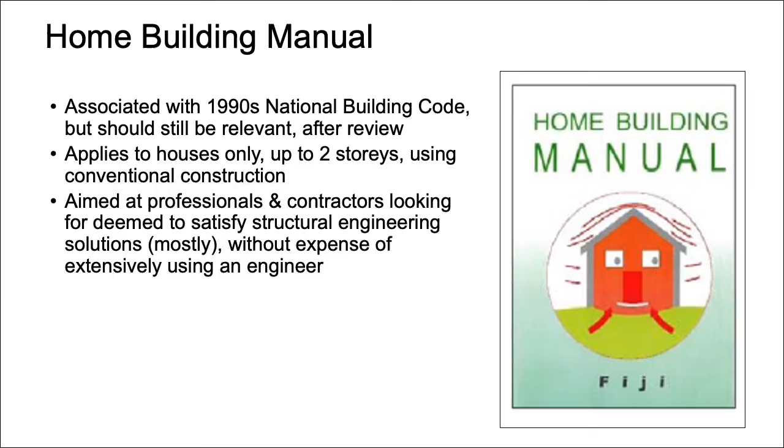And I will not be going into the details of the other provisions of these limitations. I hope you can have a look or have a copy of this home building manual, so you can be more familiar with its proper use, considering the scope and limitations of the basis of their design recommendations.

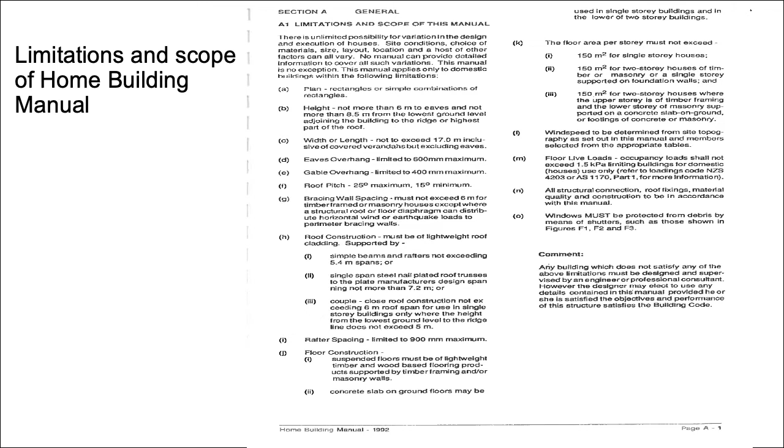So the idea in this home building manual is that based on the sizes of houses that it can be applicable to, and based also on the height of these houses, they are recommending the sizes of your columns, the sizes of your beams, the sizes of your truss, based also on varying wind speeds. So there's a table that you can just look up. You have the wind speed and the size of your structure, and then you'll get the size of your building elements, be it a column or a beam or a roof truss.

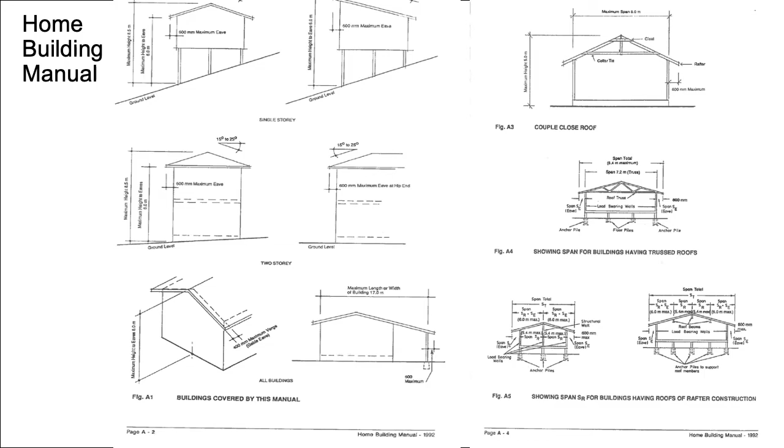So that home building manual, as I've mentioned, is still very relevant and very helpful to builders, because an engineer is not really required. All you have to do is follow the schematic diagrams that they have in there, and you'll be able to get the proper sizing for your building materials. And recently they have also been updated to consider the effects of stronger winds because of cyclones triggered by the changing climate.

So we have here the guidelines for improving building safety and resilience of new single-story houses and schools in rural areas of Fiji. This is a very recent publication supported by the World Bank. The same consultants have also looked at updating the home building manual in Dominica, and it is applied following the revised National Building Code for single-story residential housing, based on the Dominican experience following severe hurricanes there that heavily impacted the general housing stock.

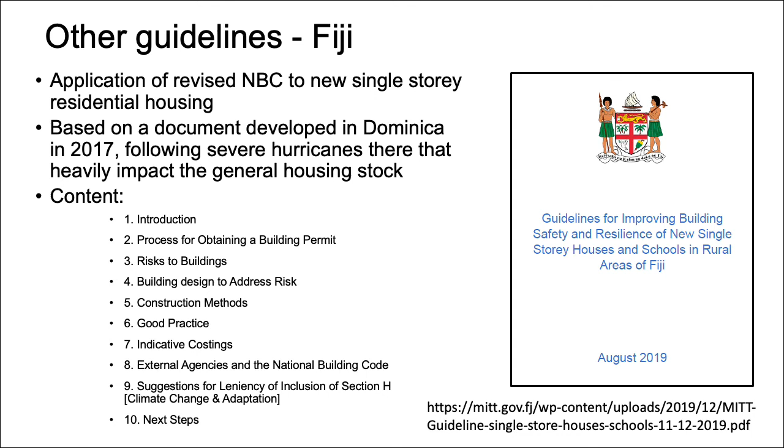So these guidelines for improving building safety and resilience of new single-story houses and schools in rural areas of Fiji can be downloaded from the government website using this link. So from the guidelines, you can see the illustrations that they've had in there, trying to make people understand more the implications of climate change.

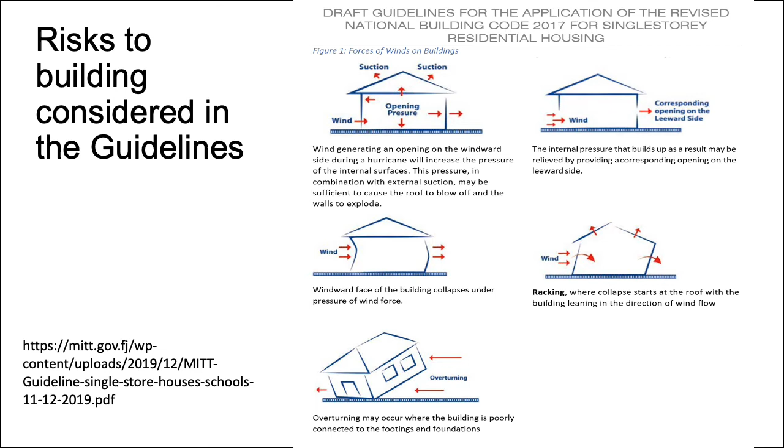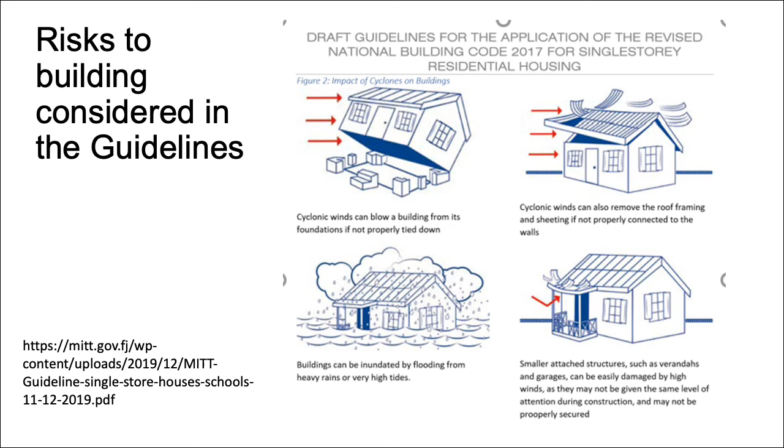Or if the roof is also not tied or braced to the building. And there's also the possibility of damage to attached structures, like verandas, that can be easily damaged by high winds. And then there's the implication of flooding from heavy rains or very high tides.

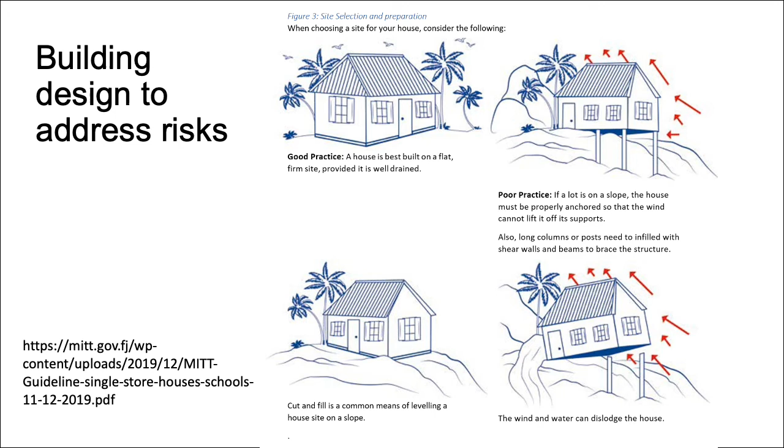They also have some suggestions, for example, on building shapes. They would prefer that the buildings be symmetrical. Long and thin buildings are considered undesirable because you don't have an even surface for withstanding the forces from wind or from earthquakes. So it has a tendency to twist, or you need some breaks in the length of buildings.

And some guidance also in choosing building sites, especially if you're near slopes. You don't want to be building your house just below a slope. There has to be some considerable length of easement, so if a landslide happens, there will be less damage, or at least your house will be spared.

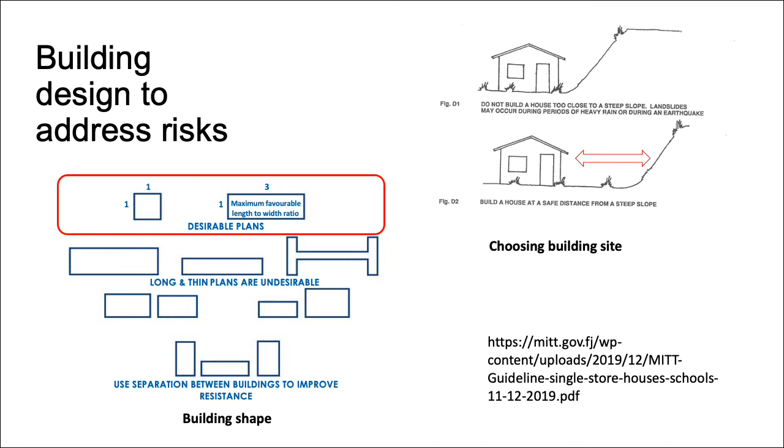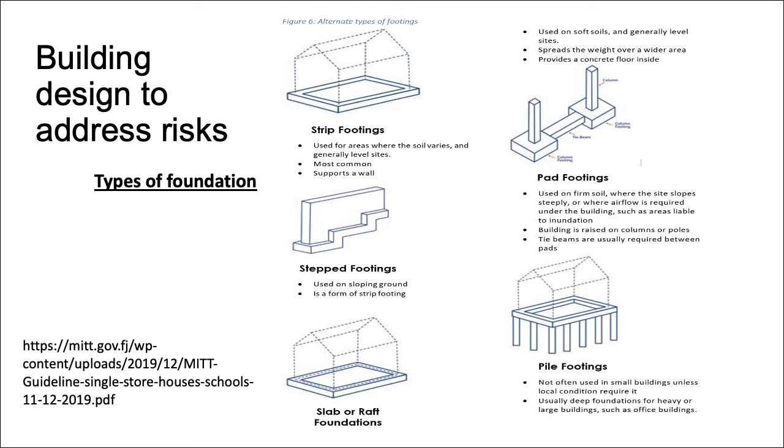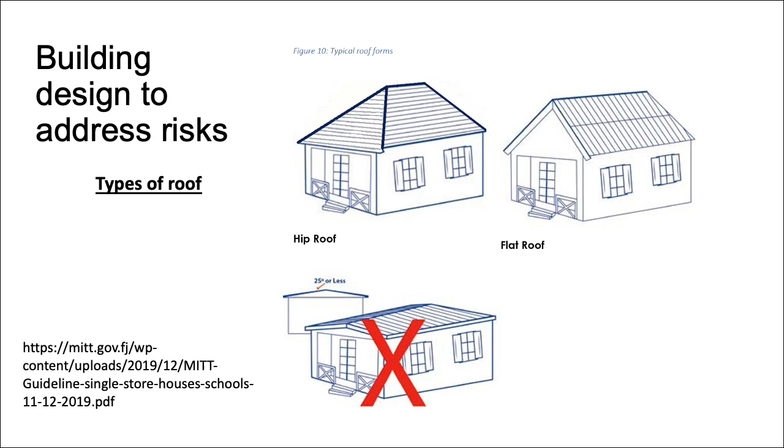So the guidelines also discuss construction methods for basic mixing of concrete, what type of reinforcement bars are needed, how to do jointing or splicing of rebars, how to bend rebars, or what's the required edge distance for rebars.

They have some guidance for footings and foundations, also on how to construct floors, whether concrete or timber framed. They also have guidance on how to build walls using concrete block and reinforcement, or if timber framed, the ideal basic framing sizes, the lintel beams and bracing necessary, and cyclone strapping. So I won't go into further detail on these construction methods, because I'm expecting that you'll be able to download the whole guidance document.